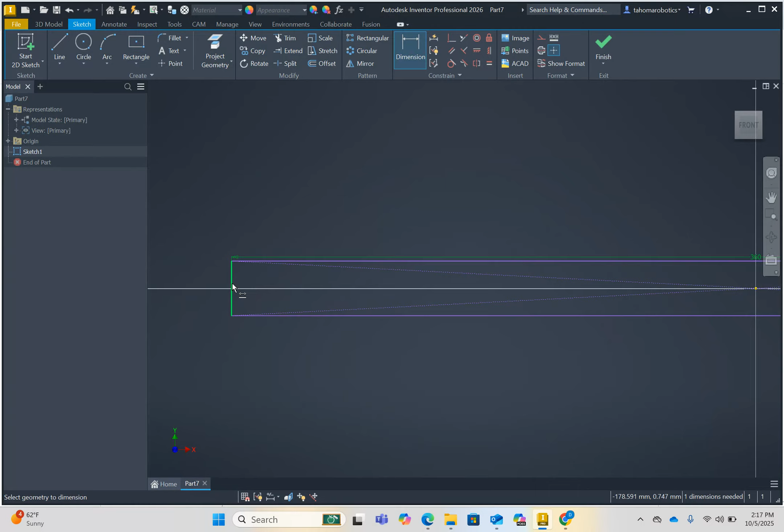Now, we'll talk later in this assignment about parameters. Right now, instead of typing 360, I'm just going to click on this and hit check mark, and that defines them both to be the same size. And so if I changed the first dimension, it would change the second so that they're equal.

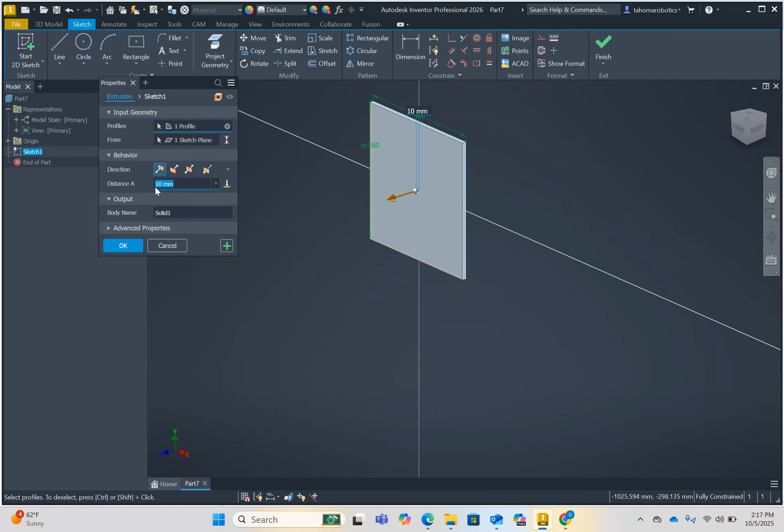I'm just going to immediately extrude this, and I'm going to extrude it 10 millimeters. And for right now, I'm going to extrude it in the positive Z direction. You can do in the negative Z or symmetric. I'm choosing positive Z because of how I want to do the mirroring later, but either one of these would work.

Creating that, I'm going to make another sketch, and I'm going to just do a project geometry and an offset, and in 50 millimeter offset I'm going to put these points at each corner. And so notice with a single dimension I can define the location of all four of these points. They're in from each corner at 50 millimeters.

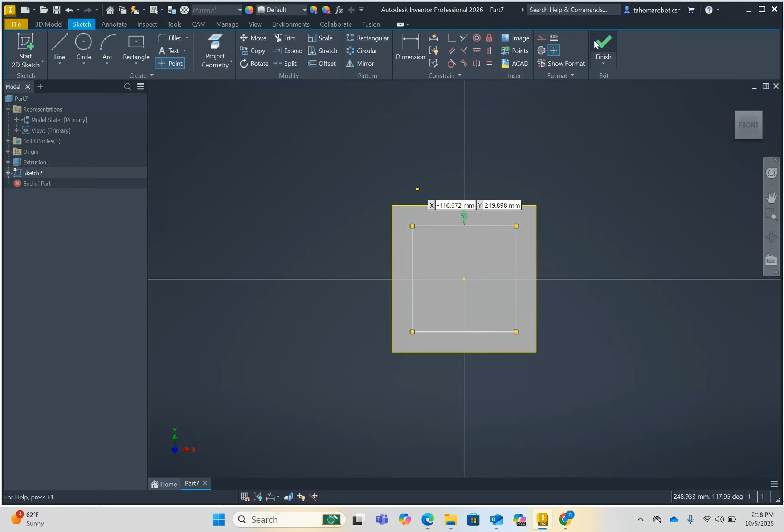Then I can hit finish, and I hit the hole feature, and here I can choose the counterbore, and it's just remembering what I had when I first designed the part. So basically the way you do this is choose the hole. We don't want a threaded hole or anything.

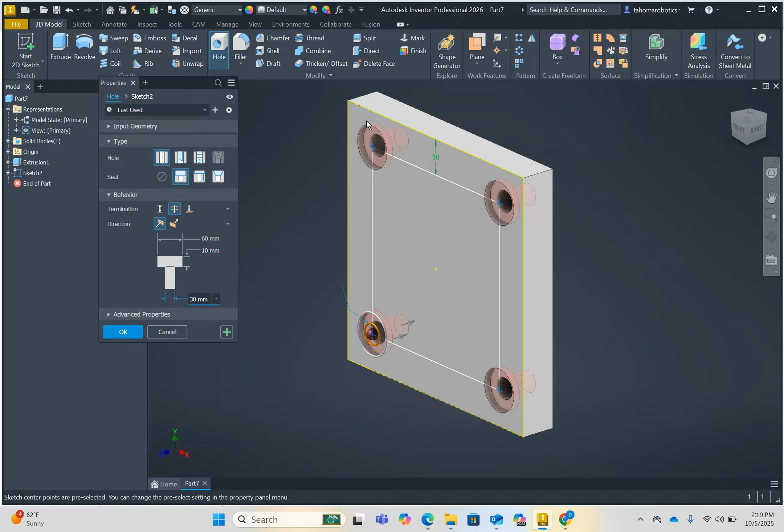We basically want a simple hole, but the seat we want a counterbore, and that's this part right here that has a wider diameter and it goes a certain depth. The counterbore diameter is 60 millimeters, the depth of the counterbore is 10, and then the depth of the through hole is 30. And that's how we can make that.

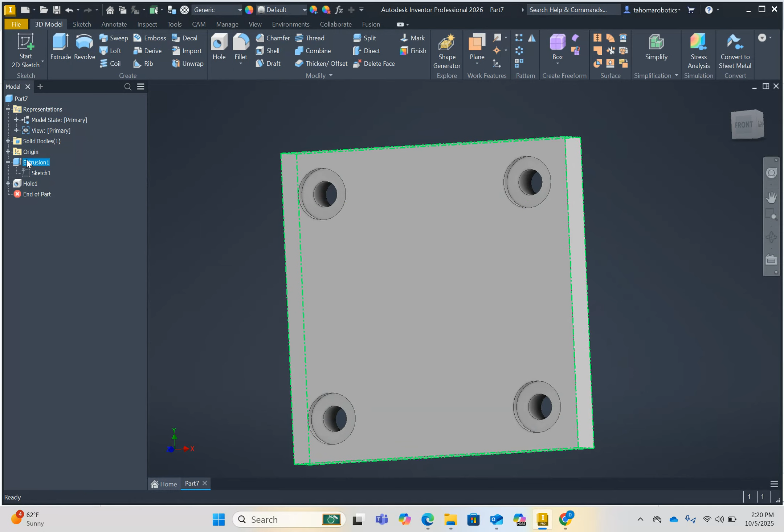We also need a hole in the middle that is 210 millimeters. I could have made that in my initial extrusion, and in fact, why don't I go back and just double click here and make that. I could have done that in a separate sketch, but let's just make it in the original sketch. I will need to edit my extrusion, and so to do that I can double click on the extrusion and just deselect the center hole, and that I can just go control click, and that makes this.

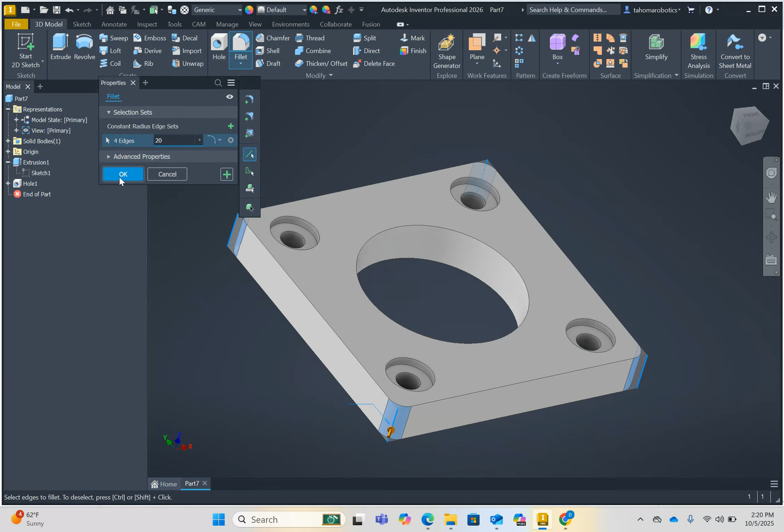Then I'm going to add the fillets. Looking at the drawing, the fillet radius is 20 millimeters on each corner, so I'm just going to go here, set it to 20, and then select each corner. And then hit OK. So now I have this piece.

What we'd like is you can see through the part here that really this is just a repeated piece over here, and so it makes sense to mirror that piece. What I'm going to do before I mirror that piece is I'm going to draw this little arc here. You can see that it is 100 millimeters straight, and then we have this curved radius that's 210 millimeters in radius that creates this 90-degree arc, and then we have another 100 millimeters where the other flange or mounting plate is where it starts.

And so basically, I'm going to draw this shape in a sketch. Then I'm going to create a couple of planes, and I'll demonstrate that so that I can mirror this over here and make a copy, and so they're linked. And so if I ever change the design here, it would update it here, and so I'm not really designing it twice. So what I need to do is draw that arc.

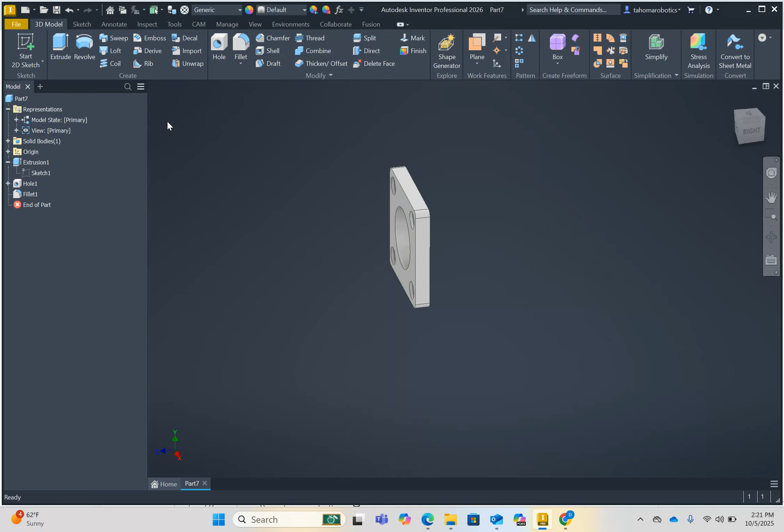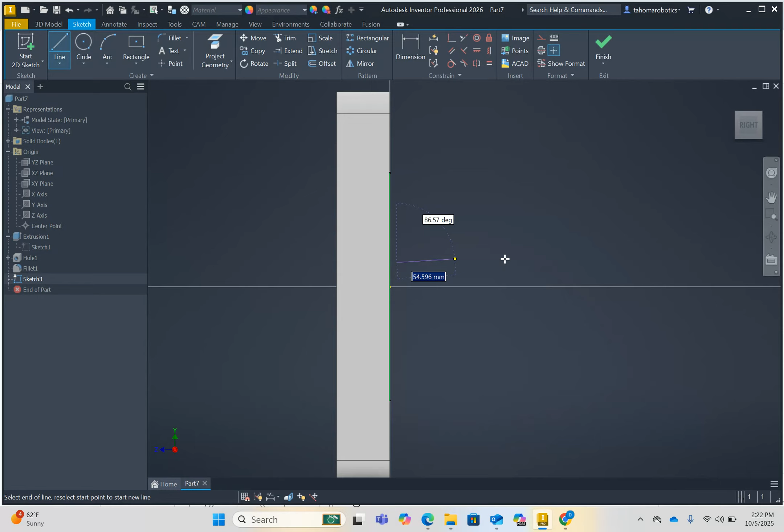So the first thing I'm going to do is find a plane that allows me to do that, and that looks like this plane. And so I'm just going to select that plane and create a sketch, and then start drawing. And I'm going to be careful that this snaps into the middle. If I don't, I would need to use a constraint. So let's say that I just drew some random line like this. You could force it to be in the right location.

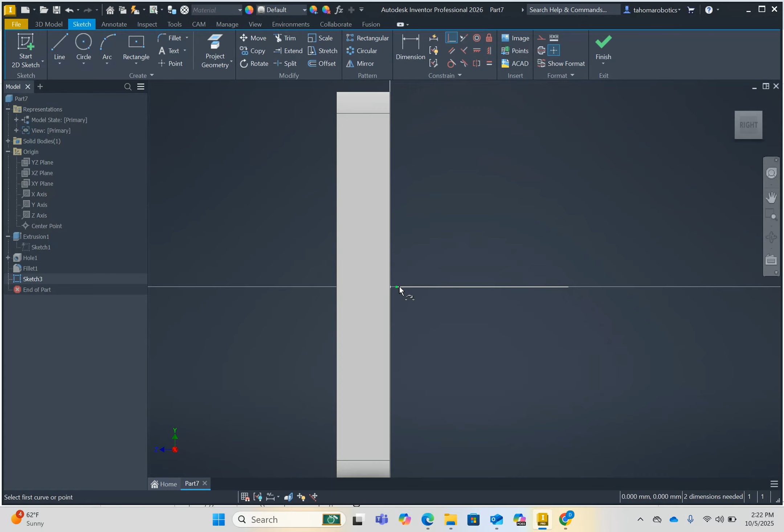The first thing I would do is make it horizontal. Notice that my horizontal is actually vertical here, and that's because of the plane that I chose. It's just rotated, so I'd actually need to do the vertical constraint to make this line side to side. Then I'm going to select this point and this point to make sure that they're aligned side to side or horizontally. And then I'm just going to do a coincident constraint from here to here, and then dimension that to 100 millimeters.

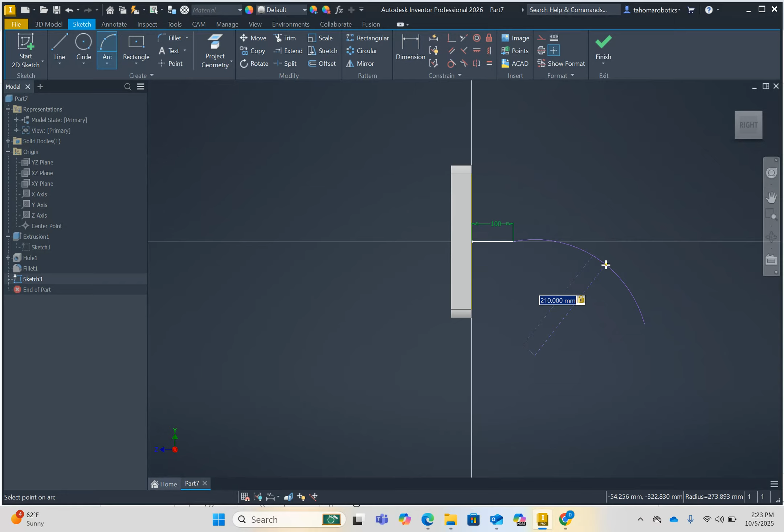Next thing I'm going to do is just draw an arc, making sure that it attaches here. It goes somewhere over here. We'll find that later, but we know that the radius is 210, and we know that we want this line and this curve to be tangent.

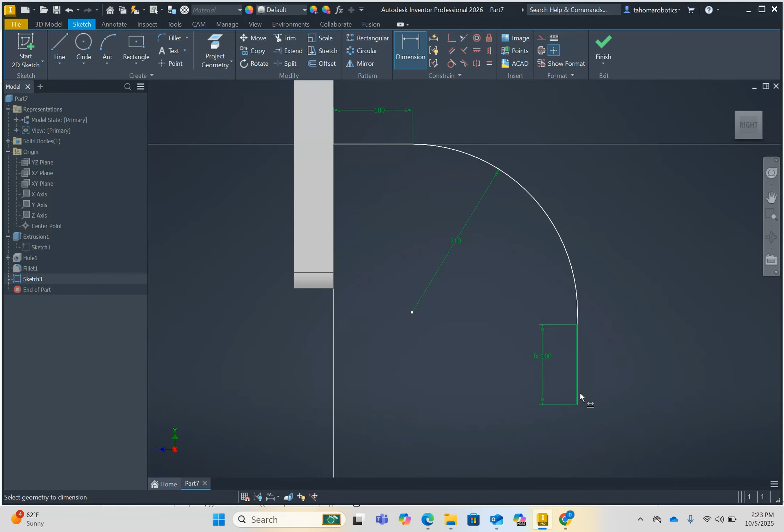Then I'm going to make a line here that is 100 millimeters long, and we want it to be vertical. And instead of typing in 100, I'm just going to go here and make sure that these two are the same. And I need to make sure that it is vertical, but since this is rotated, I need to use a horizontal constraint. If that bothers you, you could just actually rotate the part like this, and then I can choose this horizontal constraint like that. It looks like that constraint already exists, which is great.

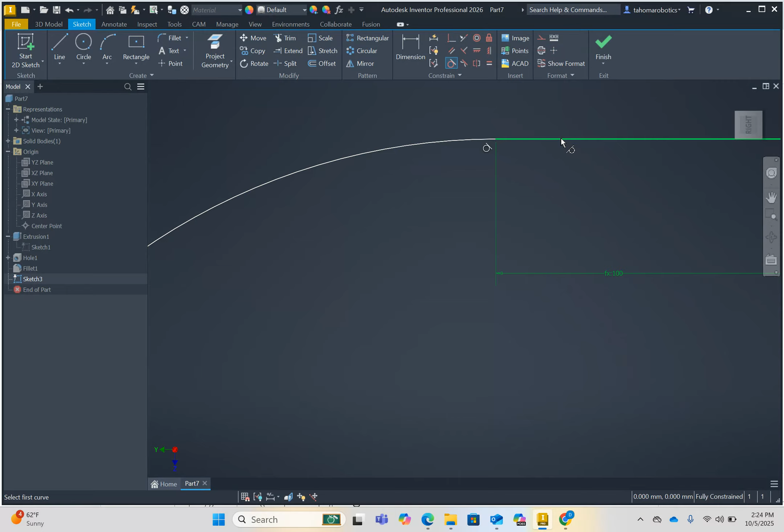I do want to ensure that the endpoints are touching. It looks like they are as well, but if they weren't, I wanted to make sure that they were coincident. And the final thing I want to do is make sure that this curve is tangent to this. So hitting the tangent, clicking here and here, we can make that tangent. What that curve allows me to do is define the plane, which would be right here, which would be the start of the new flange or this mounting base.

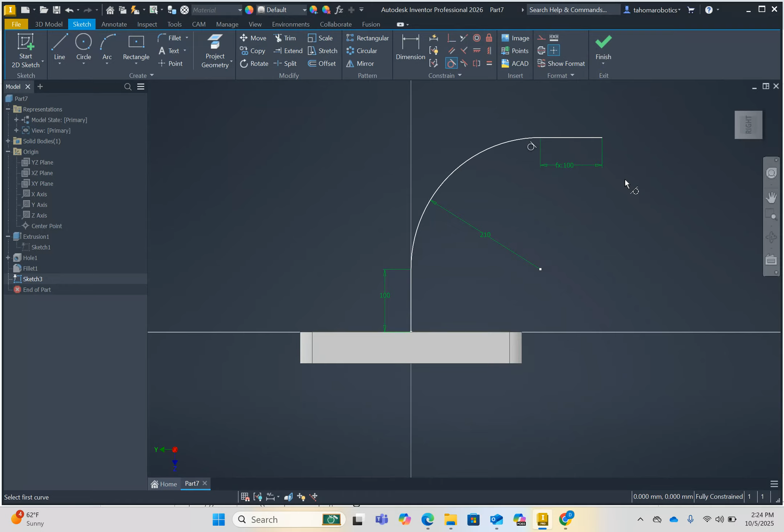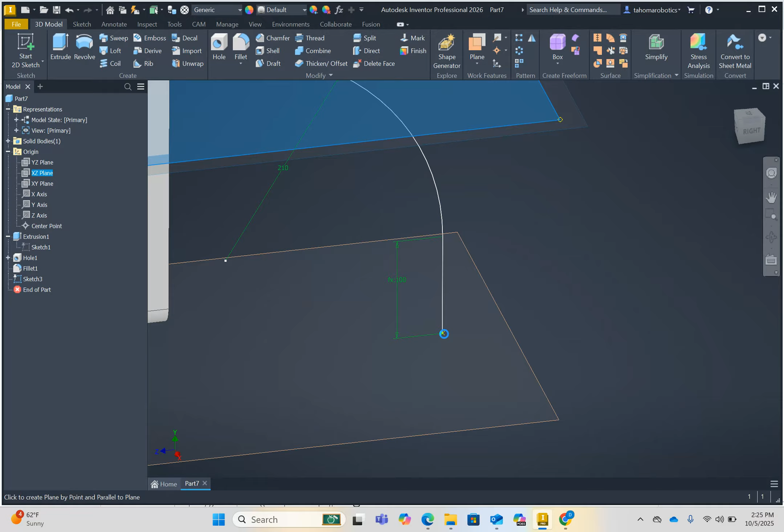And so we're going to mirror such that it starts at this location and extends out over here. So to do that, I'm going to finish the sketch and go to the plane tab. Basically what I want to do is create a plane that is parallel to some other plane and through this point. So specifically, I want that plane to be parallel to this, but I want it to go through that endpoint. So I created this new plane here. You can see that. And that is going to be the beginning of the face of the plane that creates this new mounting plate here.

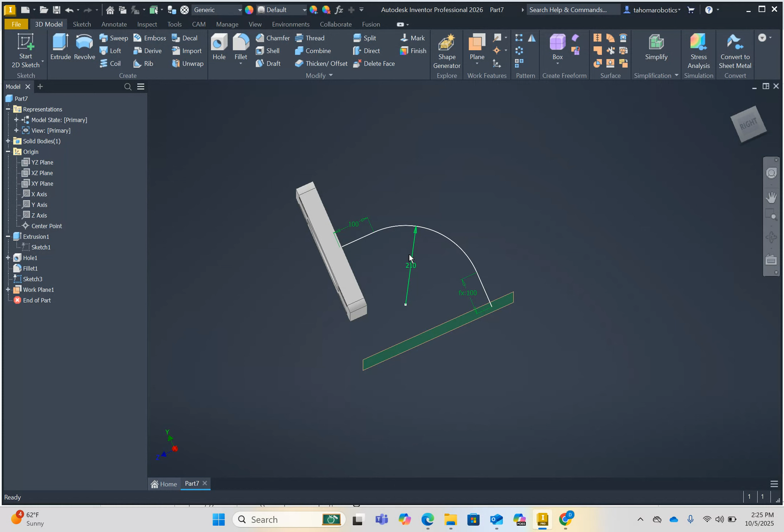Then the next thing I need to do is create a plane where this mirrors about, which needs to be a mid plane that goes basically here at 45 degrees. So on the plane tab, I'm going to say create a mid plane between two other planes. I need a mid plane between this plane and this plane, which gives me that. That is going to be the plane that I mirror all these features about.

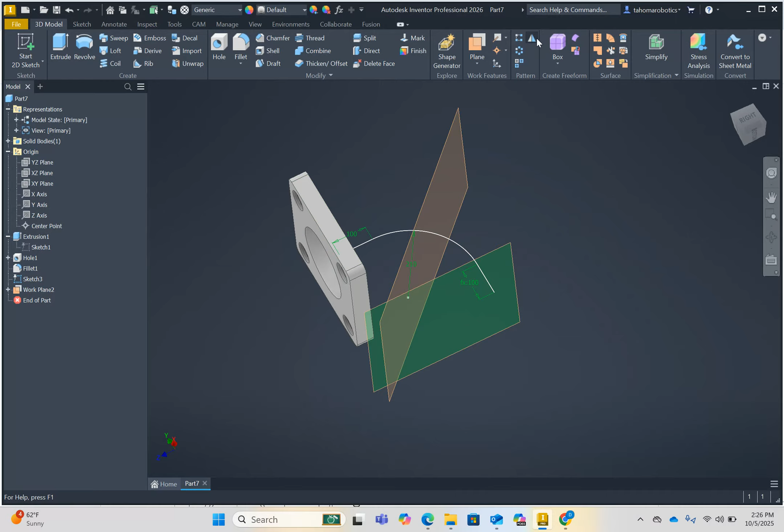So the next thing I'm going to do is click the mirror. The features I want to mirror are my original extrusion, the holes, and the fillet, and then the mirror plane is this plane here. And it pops up a preview of what it gives me. Everything looks good, and so now I'm going to hit OK.

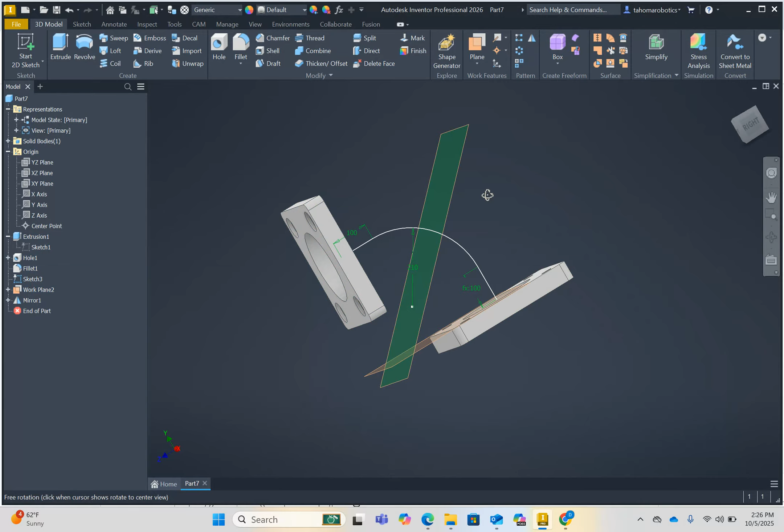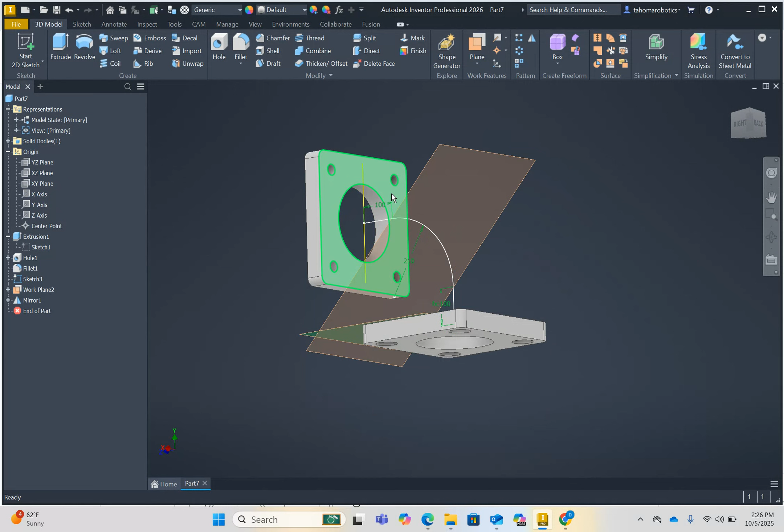So now I have basically the two mounting flanges, and what I need to do now is make the circular part that extends. To do that, we're going to use something called a sweep. In short, we're going to draw the shape we want, which is basically a circle, and then extend it to this part through the sweep feature. I'm done with this plane, so I'm going to right click and go visibility. And I'm done with this plane too, so I'll turn visibility off on that one so they're not showing up.

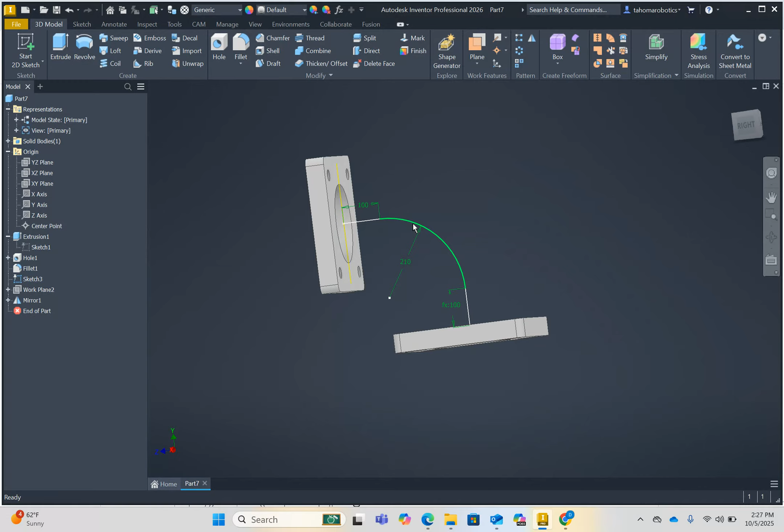Notice I have the sketch just hanging here. We're going to need that when we do our sweep, but what we need to do is create the feature we want to sweep through this arc here. Looking at this, you can see that we have the 210 millimeter inner diameter that represents the inner diameter of that pipe, and then a 260 millimeter outer diameter. So we just put those two dimensions in, and then we can extend that arc through.

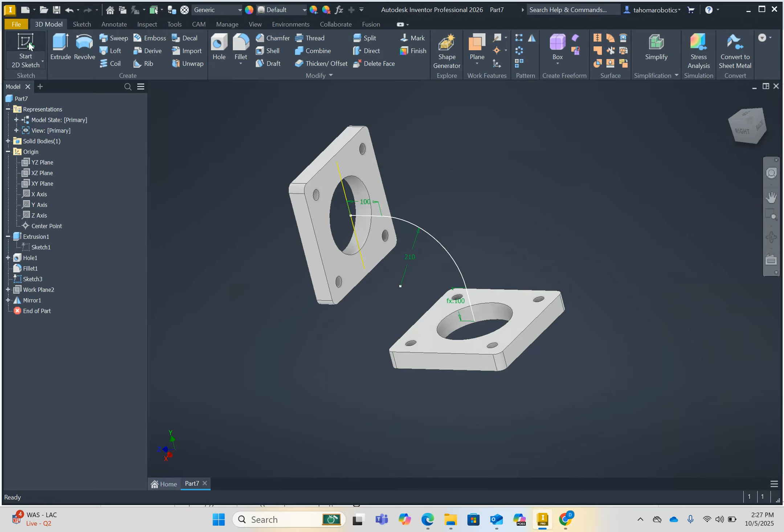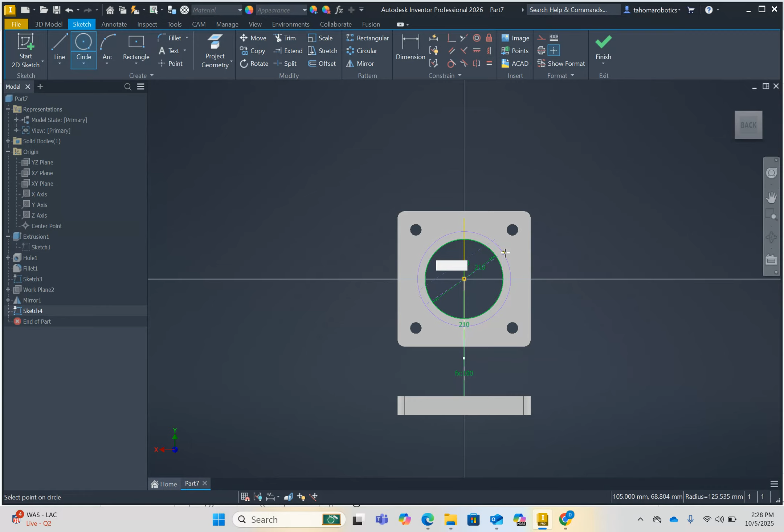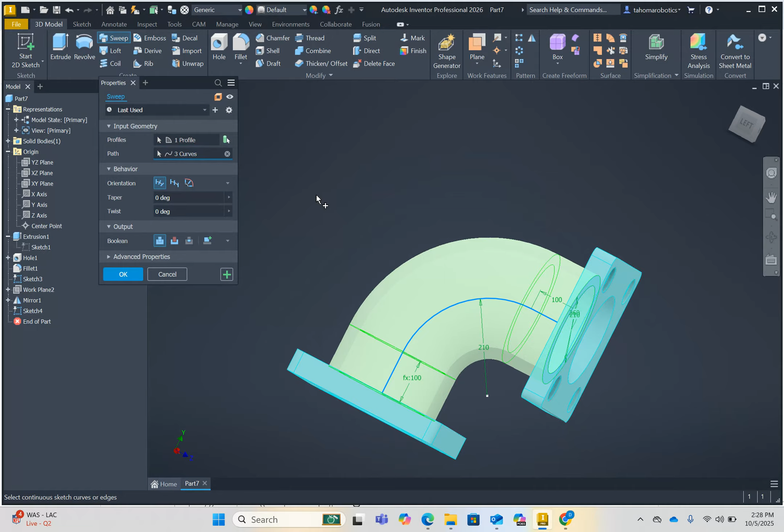So going to our drawing here, we can create a new sketch on this plane. We know we have the 210, and I can just draw that, or I could have projected geometry because we know that inner diameter is 210 there. And then we have our 260 here. So we have those two, and we should now be able to finish this and hit the sweep. The feature we want to sweep is this, and the curve that we want to follow, that profile, is this profile. It sweeps through, we hit OK, and we get that general shape.

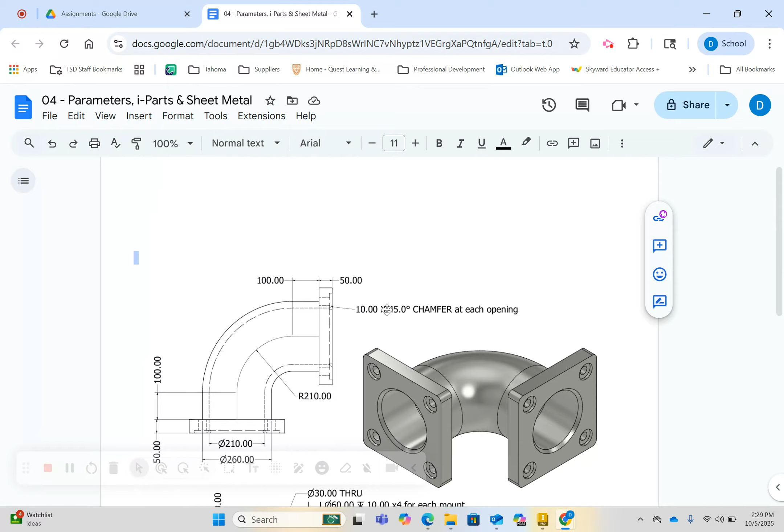And the final thing we're looking at is the fillets. Let's see where that's at. It's written here. Not fillets, but a chamfer, a 10 millimeter, 45 degree chamfer. You can see it a lot easier in the 3D model. It's these chamfers at each opening. So I'm just going to do that. I could have done that earlier on this face and then mirrored it here, and that may have been a little cleaner. In fact, that's probably what I should have done. It really doesn't matter too much, but we can just go 10 and make that one there, and then this one here, and go apply.

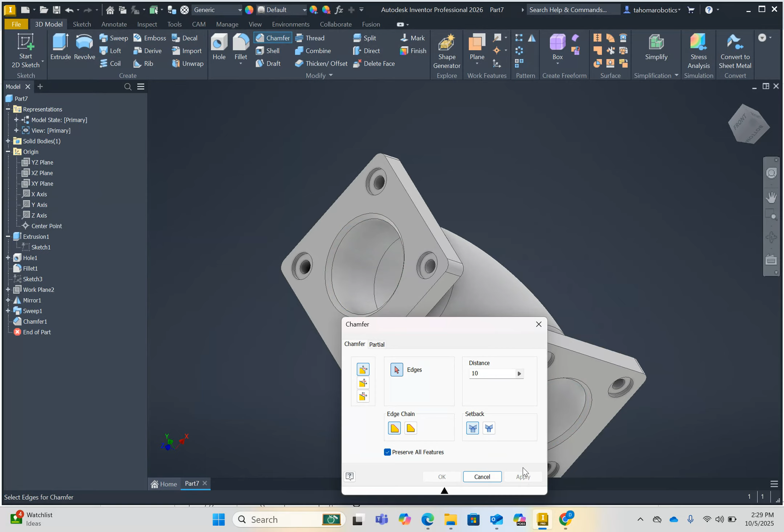What we will do in subsequent videos is talk about how we can add parameters and name the actual dimensions, and then we can make an iPart, which allows us to make adjustments to this when we make an assembly. So when we place this into an assembly, we can change its size based upon the settings we choose.